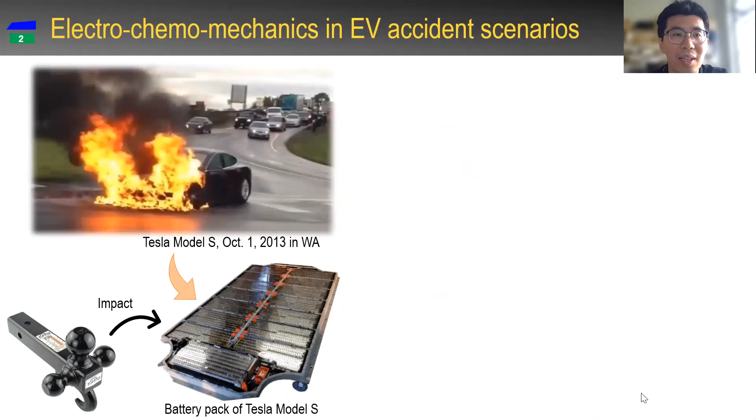You must have seen this picture in social media, about a burning Tesla on a highway. So what happened? According to the accident report, a tow hook from a truck hit the bottom of that Tesla car and its battery pack. Inside that battery pack, one or several battery cells were severely damaged, causing an electric short circuit and the fire of the whole car.

Behind this fire is what we call electrochemomechanics, the interaction between mechanics and electrochemistry. We have mechanical deformation and failure first in this case, inducing undesired electrochemical reactions, and these reactions in turn generate heat to make the failure propagate. We call it thermal runaway.

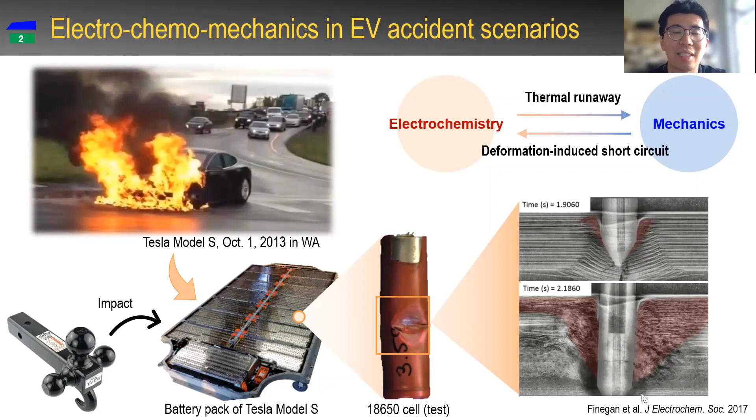There have been many nice experimental studies, and the mechanisms of such accidents, in my opinion, are already quite clear to us. However, modeling this accident is still a very complex problem. The complexity stems from three sources.

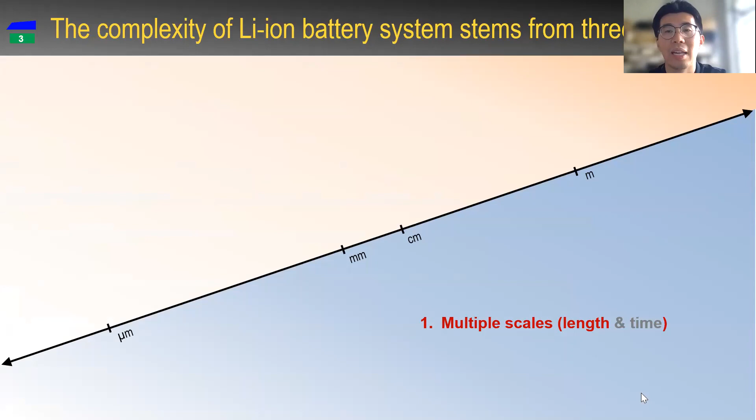First, the system spans multiple scales, both in length and in time. Here I'm only showing you the length scale. The second source of complexity is multiple materials, phases, and physics.

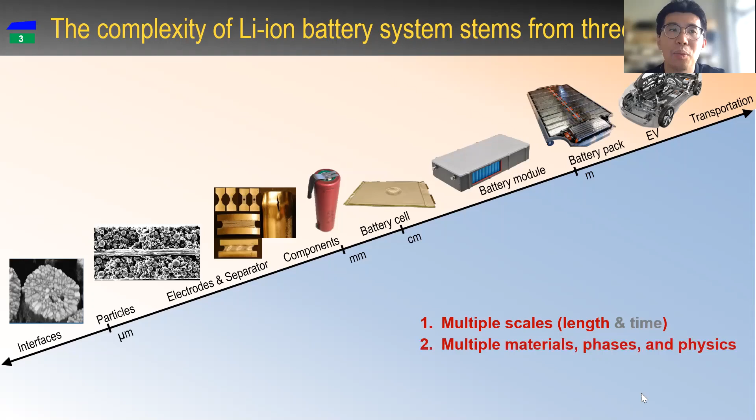At the particle level, we see phase separation; at the electrode level, we can define the electrochemistry and plasticity and flow of the granular media, and there are many more—I just named a few examples. The third source is called the curse of dimensionality: the complexity of the system increases exponentially with the number of variables and degrees of freedom.

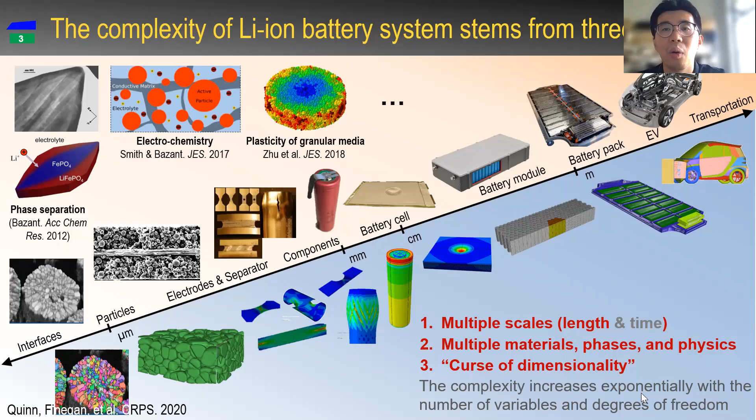So looking at this battery, our team is now able to establish models and theories at each scale, but it is extremely hard to develop one unified model that can cover several scales. So in the first part of today's talk, I will show you how our team followed a physics-based roadmap to predict the failure of lithium batteries.

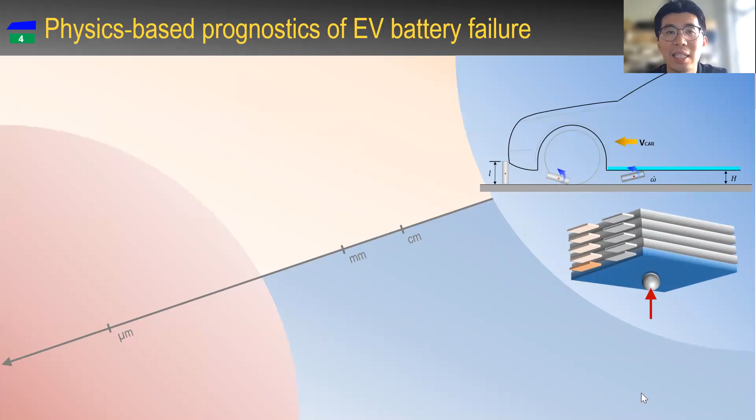The background is the Tesla accident. When an external object hits the bottom of the car, it can deform the battery cells. Indentation tests are commonly used to mimic this scenario, and X-ray CT scanning is now a popular choice to visualize the damage.

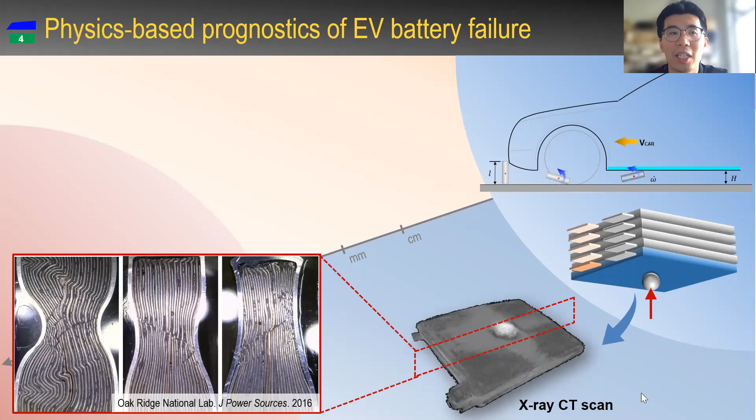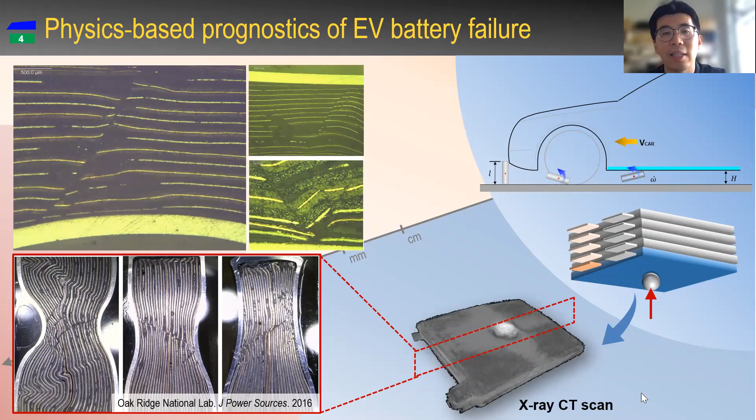But a cheaper and sometimes more effective way is to cut the cross-section of the cell, polish it, and do microscopic imaging. There are nice pictures made by our colleagues at Oak Ridge National Lab. After zooming in, we can see a clear sign of shear fracture of the structure, which causes a mismatch in the contact between the positive and negative electrodes. That means a short circuit.

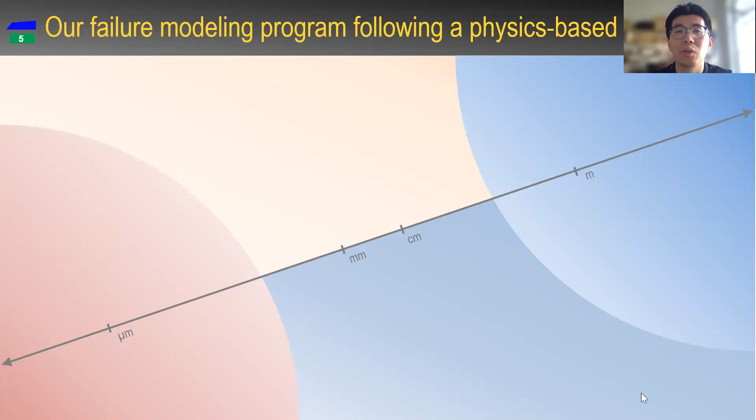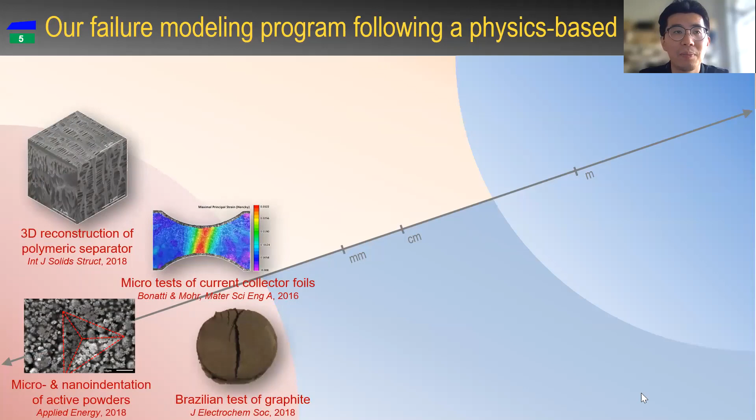Time is very limited for my presentation, so I just want to use one slide to show you how the physics-based roadmap looks. In the past 5 years, our team started from micro testing of the battery components. Using the mechanics learned from those tests, we first established a finite element model of the drained layered structure, then extended it to poromechanical by including the flow of electrolyte. Finally, we added electrochemistry and thermal effects.

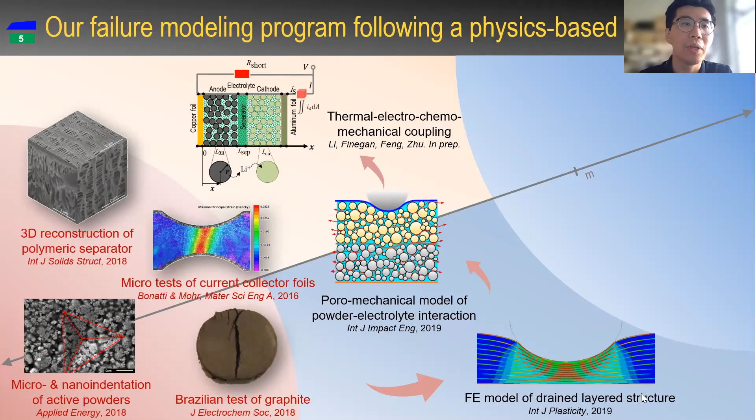We use those models to reconstruct the EV fire accident, and at the same time performed a cell-level damage assessment with X-ray CT scanning to validate our model. The biggest advantage of this kind of physics roadmap is that it is reliable.

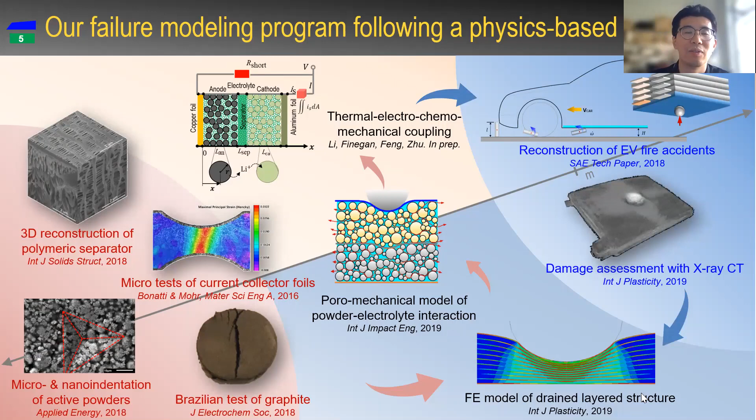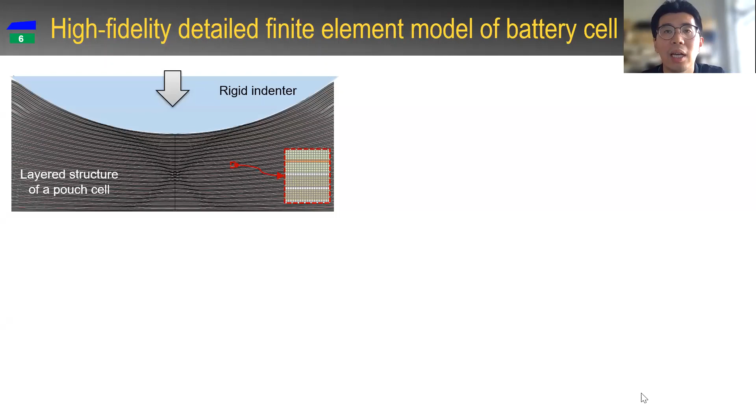Let me take two models out to support my statement. This is the detailed finite element model of the whole battery cell—every single layer is characterized as a continuum layer with fine mesh size. Here I'm showing you the deformation pattern on the cylindrical rod indentation, and we can already see clearly that there is shear localization.

We also examined the force displacement response taken at the rigid indenter. The solid line is experimental data, and the blue dots are the numerical simulation prediction. We see almost perfect agreement despite a small overshooting at the end. Actually, this small figure is my personal favorite because it delivers a very important message about the physics-based roadmap, which is that as long as the physics is correctly learned, there is no need for computational tricks.

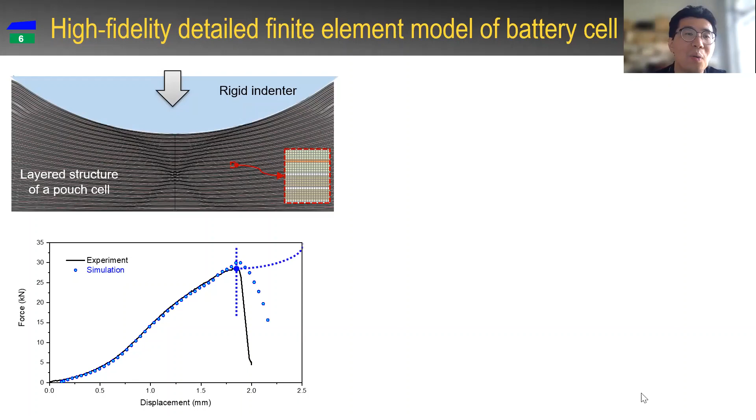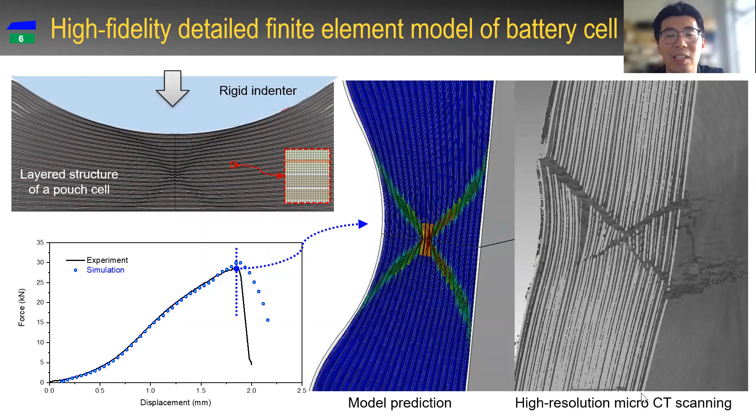We simply put all the layers upon each other and gave them the correct constitutive laws, and the result is already very good. So what is even more exciting is that we compared the shear localization pattern with the high-resolution micro-CT scanning. Again, we found a very good match, which suggests that our modeling of the solid skeleton is very successful. But I still want to point out that this is still not the real structure.

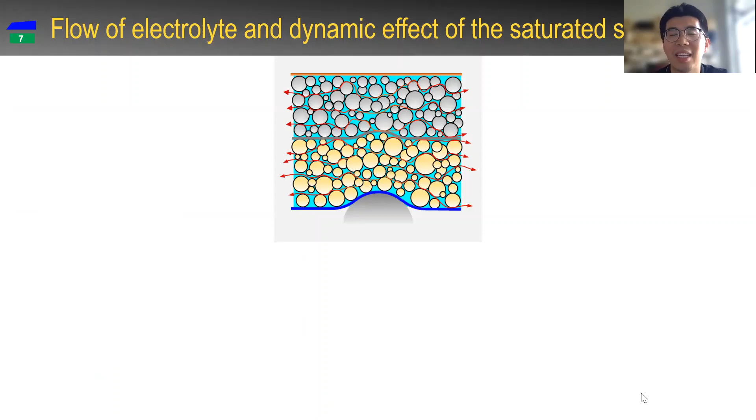Actually, in reality, as I already mentioned, there is liquid electrolyte. During the deformation induced by external load, the electrolyte can be squeezed, and there should be micro flows between the particles that can contribute to mechanics.

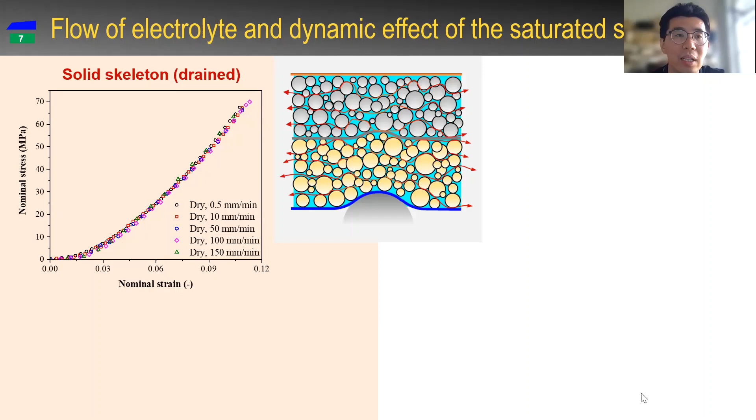To validate this mechanism, we performed two groups of control tests. In the first test, we performed compression tests on the drained dry solid skeleton samples at 5 different loading speeds. In the second group, we did the same tests on saturated porous media, which means with electrolyte.

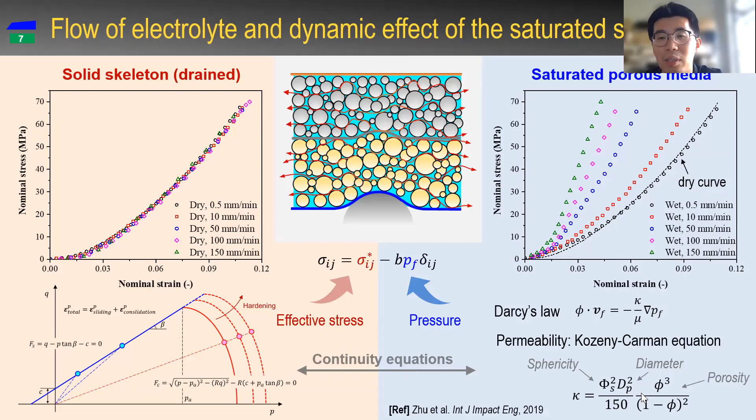So clearly there is a dynamic effect. The stiffness increases with loading speed. Therefore, we developed a poromechanic model, and I'm not going into details, but I can show you the result. Using this theory, I got very good prediction of the saturated porous media, which are the dashed lines here in this slide.

So let me briefly summarize the physics-based roadmap, actually the modeling approach. We learned physics at material level, microly, and we developed detailed models to predict the mechanical properties. However, this kind of model is computationally expensive and cannot be used for car simulation. So the question is, can we scale up our success of the detailed models? One way is, of course, we can do that.

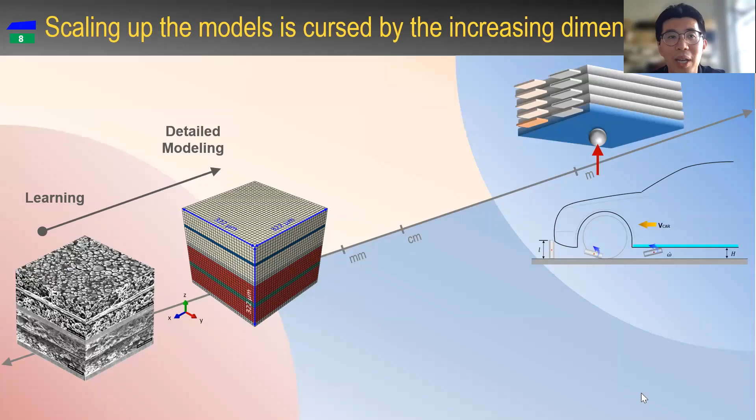One way is to develop so-called homogenized models, treating the battery structure as one unified material. Our team has very successful models as well, for example, predicting failure with a homogenized model. In this way, we can actually increase the computational efficiency of the model. However, at the same time, I want to point out that we lost a lot of physics.

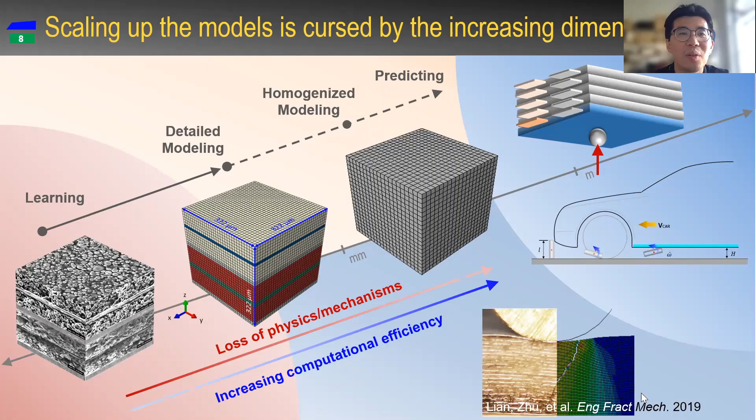As I said, learning physics is quite expensive at micro scale. Losing a lot of physics is not what we want. Okay, so recently we have seen a lot of progress in a powerful tool called machine learning. So we ask ourselves, can we scale up physics-based models with the help of machine learning?

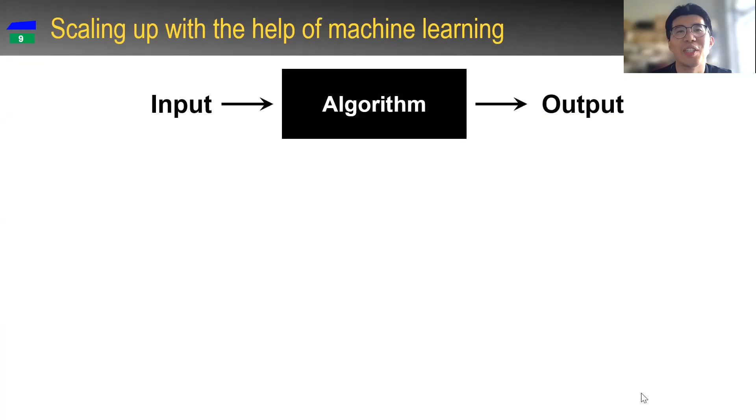Our first impression of machine learning actually is it is a powerful black box.

We parameterized the car crash problem and made use of our high fidelity detailed model of the battery cell and generated 2,600 simulations. We labeled the result as a short circuit or safe condition according to whether there is a crack in the separator. And then we randomly divided all the data into 8 groups. 7 were used for training and the remaining 1 for testing.

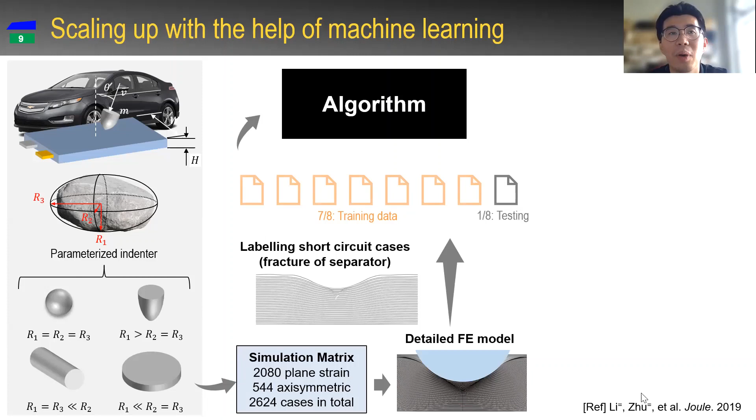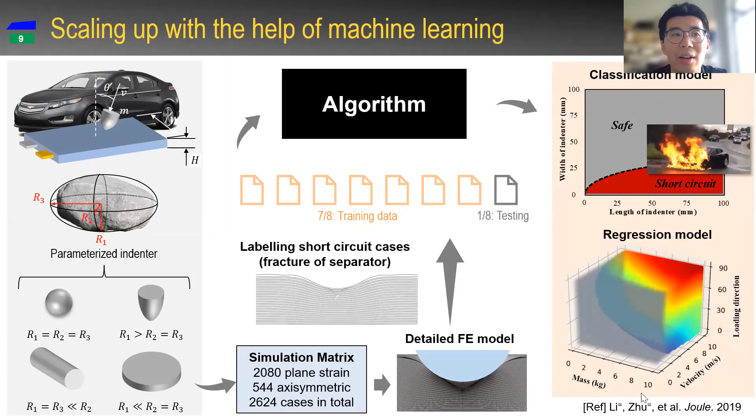We tried different machine learning algorithms and got one classification model and one regression model. The classification model finds out which is the safe range for the battery to operate and which range will cause a short circuit and even fire. And the regression model can tell us how far away we are from that undesired accident.

So this is actually a typical example of a data-driven model. What we use is over 2,600 cases as input and the output is called a safety envelope that can be used by the EV battery management system to make decisions.

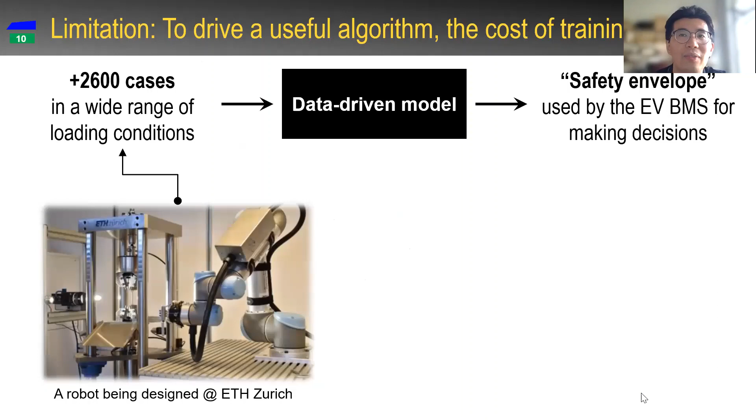At the same time, we are also improving our training data. On the one hand, we are developing a robot to do real battery tests at ETH. And on the other hand, we are working with NREL to make use of their open source data.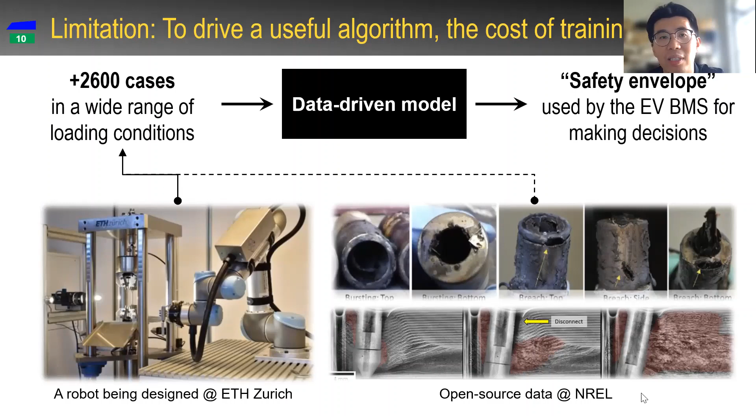So from this example, actually, I want to say that we can see that there is a clear limitation of this kind of data-driven approach. The limitation is that its applicability depends on whether you can get and obtain and afford big data or not. So this is a big limitation.

Then I started to rethink this situation. So actually data is actually not the only thing that we have. What else do I have? So clearly we know some of the physics of the model, right? So this is actually my part one of the talk. So why not implement some already known physics into data-driven approach? Okay, of course, I'm not the first one who come up with this kind of idea.

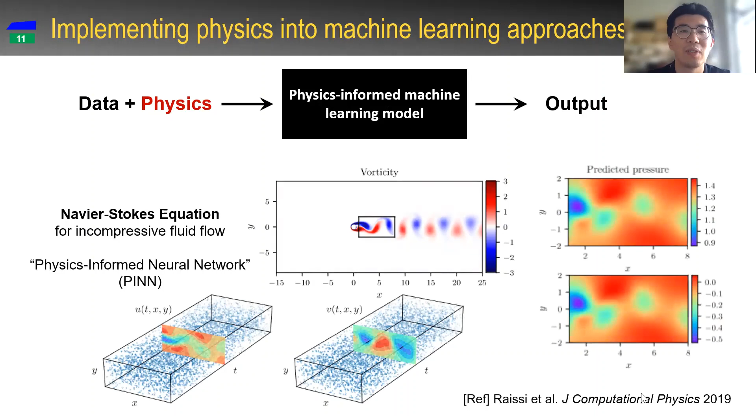Some pioneering algorithms have already been developed and got initial successes. For example, Raissi's paper, in my opinion, is probably the first to propose the idea of physics-informed neural network, or PINN. They studied the flow of incompressible flow, and as we know, the physics here is the Navier-Stokes equation, and the authors solved it to predict the pressure field.

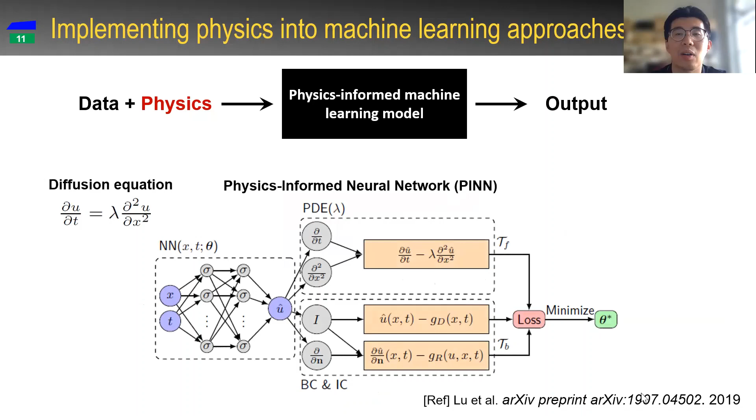Another example is Lu's work. They used PINN to solve the diffusion equation and other equations as well. In their approach, the concentration field is described by a neural network, with input being the spatial coordinates and time, and the partial differential equation, initial and boundary conditions were described in the loss function. By minimizing the total loss, they got an approximate solution of the PDE. Based on this kind of algorithm, the authors established an online library of PDE solvers.

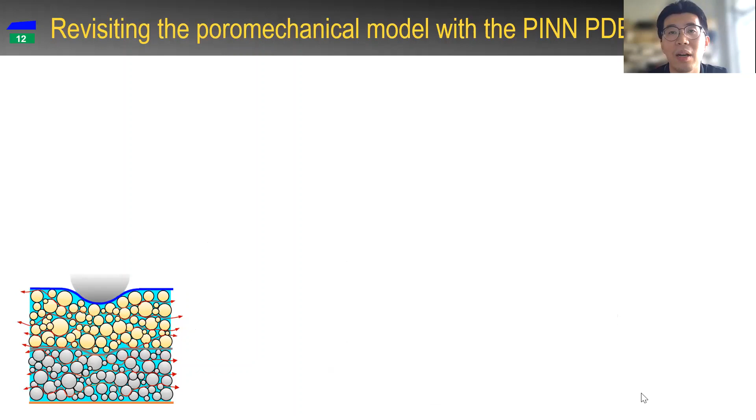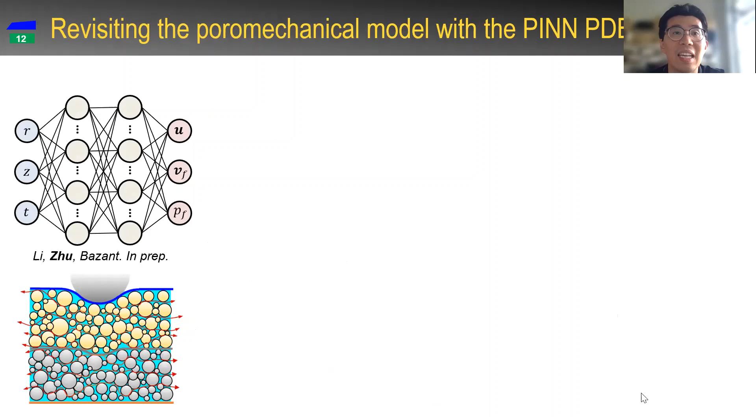Given this success, we revisited our poromechanics model of the battery with the PINN PDE solver. We constructed a neural network to approximate the displacement field of the solid skeleton and the velocity and pressure of the liquid electrolyte. Here, the known physics is the poromechanics model that I mentioned in the physics-based roadmap, but for simplicity, we only consider the elasticity case.

Even so, there are already a lot of residuals coming from the governing equations and boundary conditions. We smeared all of them into one loss function and introduced a weight vector to unify it. We then minimize the total loss function to get a prediction. We find that the pressure prediction agrees quite well compared to our simulations.

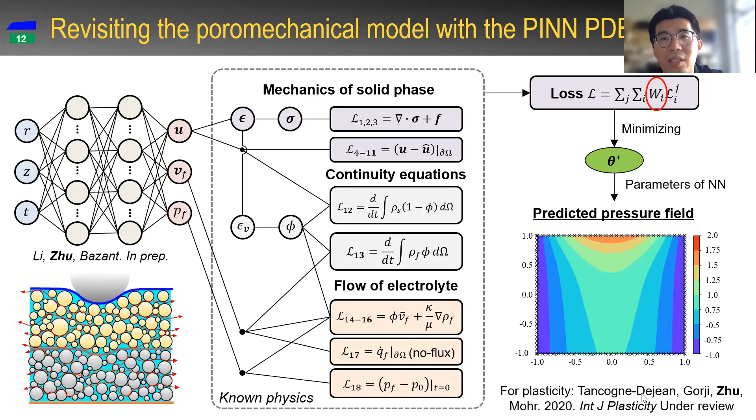This framework appears quite simple and effective, but the reality is that what we can obtain highly depends on the hyperparameters, how to tune the hyperparameters, especially this weight factor in our case. It took us several months to get a very good, reasonable result. So the question is how to determine the hyperparameters, which is very painful.

We carried out a very careful study on a simpler case, an elastic plate under in-plane loads. This is a 2D problem, and the residuals are just forced by the balance equation in two directions and four boundary conditions. The weight factors here are just 6 components to be determined.

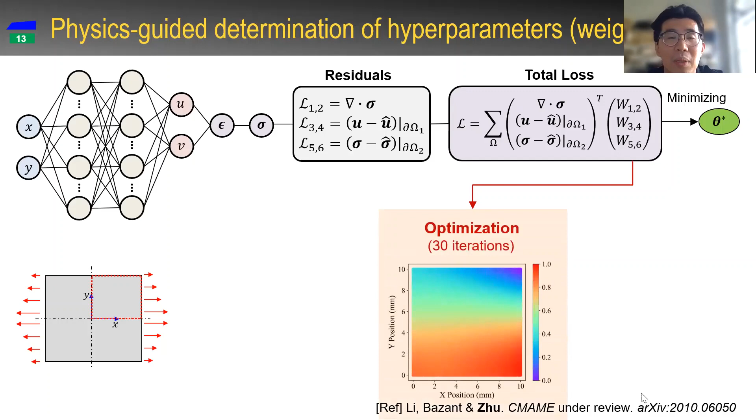We compared two ways: one is optimization, tuning these parameters and comparing it to FE simulation. The other is that we formulate the total loss function using the energy method, here the potential energy. I won't go into details, but will show you the results. We can see that in this simple case, the prediction of these two methods is equally good.

Let me briefly summarize, since time is very limited. There is a trade-off between physics and data. At micro scales, data available to us is very small, but physics can usually be clarified. With the physics-informed neural network method, we can now implement the physics into algorithms and give predictions.